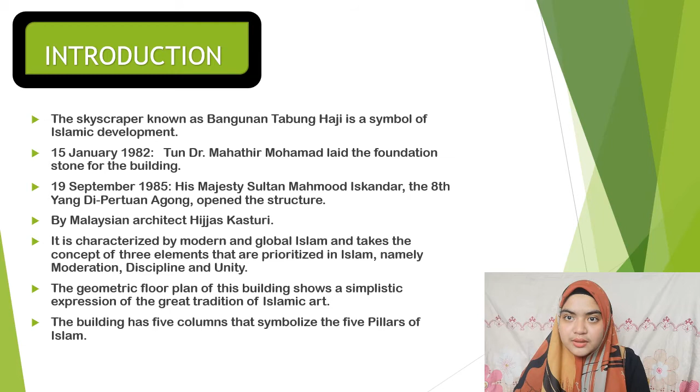The government decided to build a dedicated building for the organization while investing in the booming property market in Kuala Lumpur. This construction aimed to get more space to smooth the movement of vehicles, while the fluffy construction at the top is to balance the whole shape of the building while raising the greatness of the construction.

The round shape was chosen as the most basic and efficient shape, with a central core as structure and services. 5 peripheral columns represent the 5 pillars of Islam, one of which is Hajj. The last element is the articulated hexagon pattern crown on the 7th story, which covers the gantry machinery for extra maintenance, integrating symbolic and practical function.

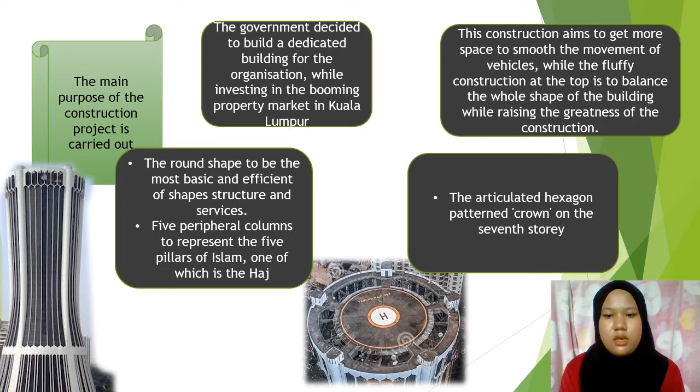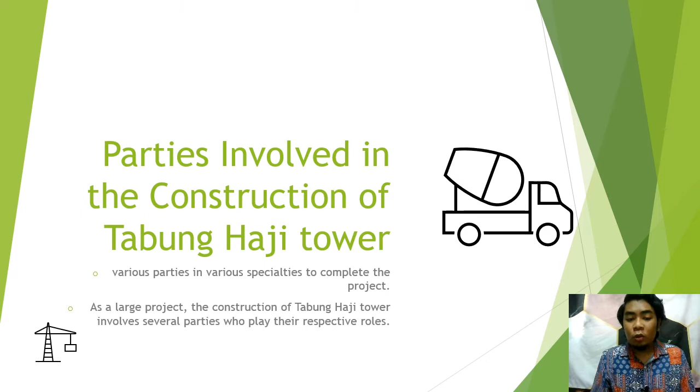For the next part, the parties involved in the construction of Tabung Haji Tower. Each project implemented has various parties in various specialties to complete the project. As a large project, the construction of Tabung Haji Tower involves several parties who each play their respective roles, such as clients, architects, contractors, engineers, quantity surveyors, material suppliers, and planning consultants.

The contractor of this project is Ireka Corporation Berhad. Ireka Corporation Berhad is the construction company that provides contractor services to Tabung Haji Tower. They are responsible for completing the work based on the price offer and the time period, based on the drawing issued by the architect and engineer.

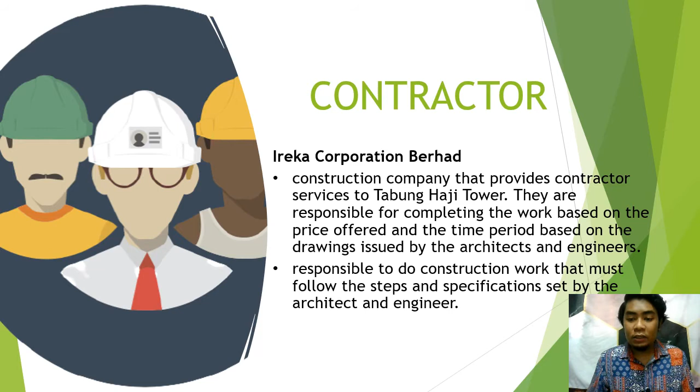Ireka Corporation Berhad is also responsible for doing construction work that must follow the steps and specifications set by the architect and engineer. The architect of this project is Hijjas Kasturi Associates, an architectural firm appointed to produce the design of this Tabung Haji Tower. The founder of this architectural company, Hijjas bin Kasturi, was the individual who designed this tower.

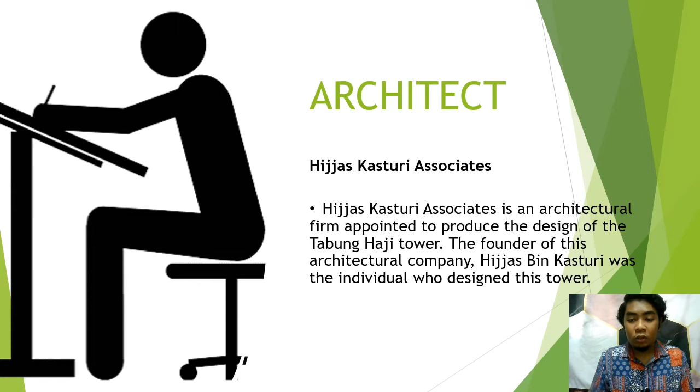One of the parties involved is the engineer, Al'azmy Ahmad. He was one of the engineers involved in the construction of Tabung Haji Tower. He has been involved in the design, construction supervision, testing and commissioning of mechanical services such as the air conditioning system, cold water and sanitary plumbing, fire protection service, building automation system, compressed air system, lift and overhead crane.

Next is the quantity surveyor. Advantage QS Sdn Berhad is the firm in charge of the preparation of preliminary estimates and cost planning of Tabung Haji Tower. Initial budgets are made by the quantity surveyor based on preliminary information from the client and the architect's rough drawings.

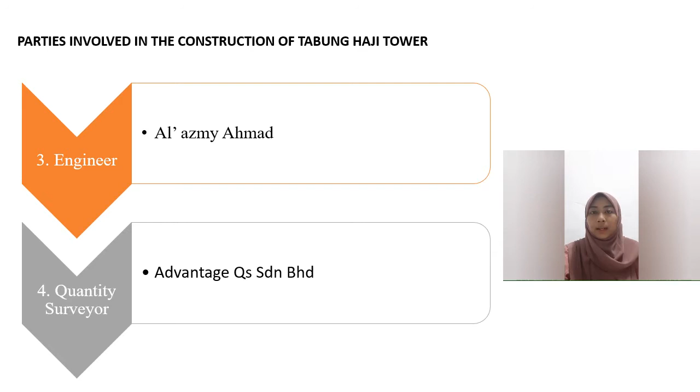Another party involved is the material supplier. The first company is Otis Elevator Company Sdn Berhad, which supplies lifts and elevators to the Tabung Haji Tower. Next is Lafarge Concrete Sdn Berhad, who are in charge of supplying concrete to the contractor.

The third company is Asia Wire Steel Mesh Manufacturer Sdn Berhad, which supplies reinforcement iron for the construction of this building. The fourth party involved as a material supplier is Sin Heap Lee Brickwork Sdn Berhad, which supplies brick to the Tabung Haji Tower. The last party involved as material supplier is Guocera Tiles, who are in charge of supplying tiles to the contractor in carrying out the construction of Tabung Haji Tower.

Next is the planning consultant. MMSB Consult Sdn Berhad is the consultant carrying out the construction of the Tabung Haji Tower. A planning consultant is needed for any construction project, as they are in charge of ensuring the planning and production of Tabung Haji Tower runs smoothly.

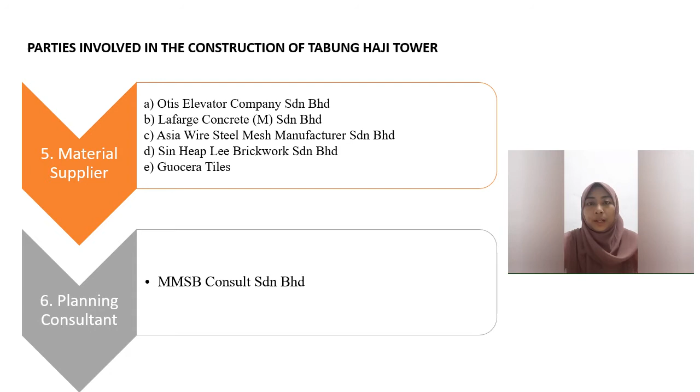Today I will present about the uniqueness of Tabung Haji Tower located in Kuala Lumpur, focusing on the design and planning of this tower. There are three points I will state: symmetry and balance, geometry, and hierarchy.

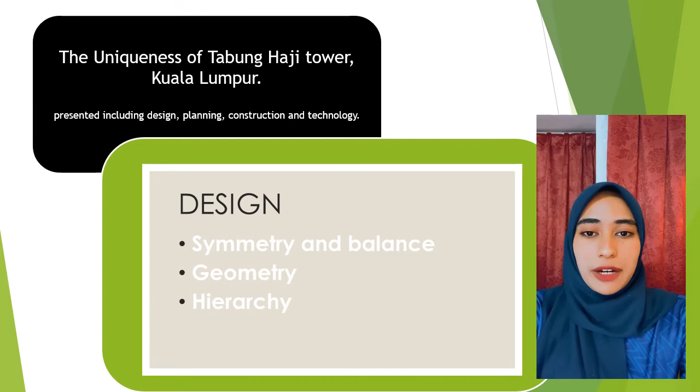Next, we move to hierarchy. Hierarchy of space within Tabung Haji Tower is well organized, with public and private areas separated directly by different floors, indicating its spatial hierarchy. Level 9 and lower are considered public space, while level 10 and higher are considered private space due to confidential office areas. Public areas include the car park, bank, cafeteria and lobby, open to all the public, while offices and mechanical rooms are examples of private areas only authorized users can access.

We proceed further with the planning of this tower. In this part I also state three points: Tabung Haji Tower took 2 years to build, it uses a precast concrete system, and it consists of 600,000 square feet.

Tun Dr. Mahathir bin Mohamad started the construction of the tower on 15 January 1982, and it was completed in 1984. After that, on 19 September 1985, the tower was inaugurated by His Majesty Sultan Muhammad Iskandar, the 8th Yang di-Pertuan Agong. This means that Tabung Haji Tower took 2 years to build.

In addition, a precast concrete system is used in the construction of this tower, through a large panel system mostly used in Malaysia. This is the most commonly used method in the construction industry in Malaysia. Finally, the construction plan of this tower consists of 600,000 square feet.

This tower has a hourglass concept that is tapered in the middle and expands at the bottom. The tower is designed with expanded space at the top to balance the structure and show the grandeur of Tabung Haji Tower.

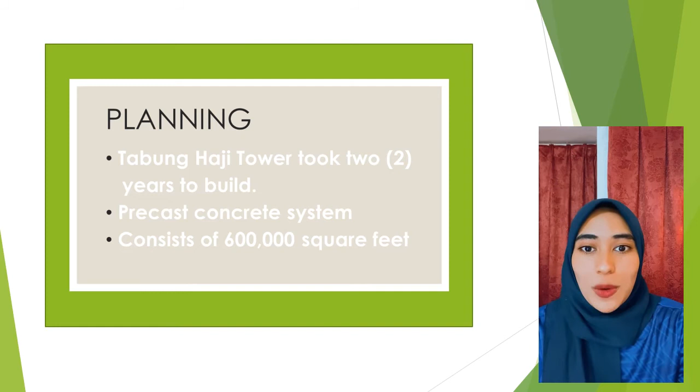Construction is a connection of infrastructure in the field of architecture and civil engineering. Large-scale construction requires expertise and technology. The construction of the Tabung Haji building uses a precast concrete system, which caused the Tabung Haji building to be built under budget.

The use of glass is also widely used in this building. The glass on the windows is colored to ensure the lack of solar energy entering the building, due to sunlight entering on a very hot day. The glass on the building is stained to ensure transparency from the outside can be reduced, maintaining visual privacy in this building.

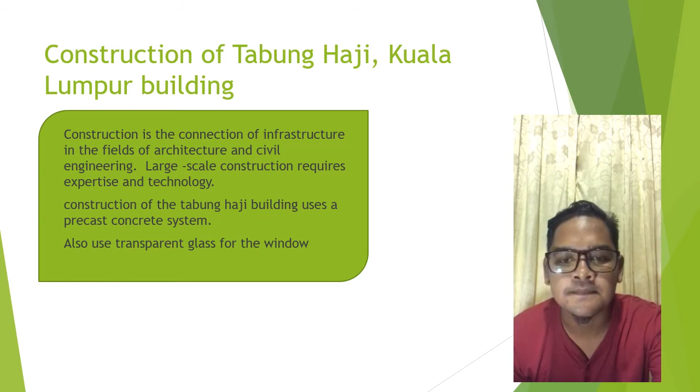Next, I want to talk about technology in the maintenance of Tabung Haji. Technology is a concept of intellectual ability combining factors of production, shown as improvement in the quality and quantity of products produced. Technology plays a role in all areas, namely economy, social and education, including in the field of construction. Technology in maintenance is important to secure the effectiveness of a building.

For Tabung Haji, this can be seen through the use of an hourglass shape on the building, which is a new and curved shape. Through the main materials used to build this building, namely glass, steel and concrete, we can see the use of height-saving technology, because using this material technology can ensure the durability of the structure of the building.

Menara Tabung Haji also used this system. We can see through its unique design featuring double curves that cast the surface of each window to look different. Tabung Haji is also considered very advanced as it has a VAC aircon system in each hollow column, which fills 1/5 of each floor surface.

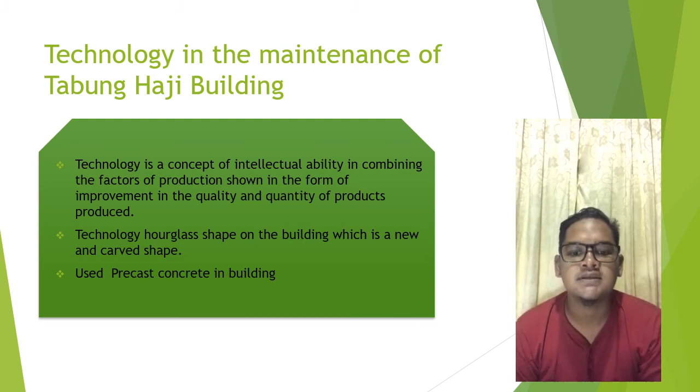In conclusion, every building that is built usually has its own characteristics and function. Therefore, it's clear that the construction of the Tabung Haji building is very important and beneficial to our people. For example, this construction in a strategic place has reduced traffic congestion in the area, as well as made it easier for the public to do business there.

Though simplistic in its expression of Islamic values, this work remains an example of modernist ideas reinterpreted within the ritualistic and true structure of the Muslim way of life. His progressive ideas of Islam as a rational religion, not to be confused with ideas brought by traditional scholars, find much-needed direction in the ongoing clash of civilizations—not between Islam and the West, but between the ideas of Islam in the traditional past and Islam in the modern world, with its different social, political and economic contexts.